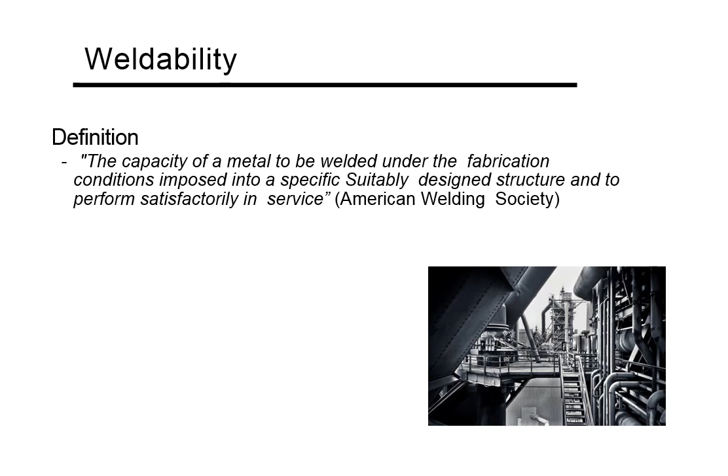When we're talking about welds, the two main mechanical properties are tensile strength and impact toughness. These are the two biggies, because you could have a material with great tensile strength that shatters like glass, or something with really good impact toughness that's really gummy and has no tensile strength - it just stretches and stretches and stretches.

So it's kind of finding that sweet spot for ferrous materials, particularly steels. You want the ability to absorb some energy, and you want the tensile strength that fits the design criteria. So these are the two ones we're looking at.

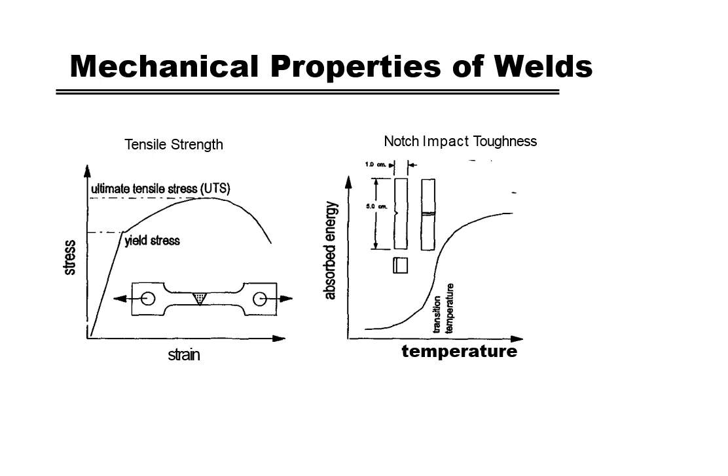Generally everybody's looking at this - all this stuff was started way before any of us were alive. And they realized tensile strength and impact toughness were the two big criteria for welds and materials made out of steels and irons and just ferrous materials in general.

Carbon equivalent. This is something that's going to come into play in regards to both preheat and post-weld heat treat. We keep talking about chemistry, and this is how we figure out our carbon equivalent. This little equation would be... loss of words there for a second.

Steels with a carbon equivalent below about 0.45 are readily weldable with appropriate procedures. So if you've got a material, and you crunch your numbers and look at your chemistry, and it comes out below 0.45, you're probably not going to have problems with it.

Carbon equivalent greater than 0.45 indicates a need for caution. Remember I said talking about caution, this should throw up a caution flag - well, this is it. If anything is above 0.45, that's when you need to start having preheat and whatnot.

Worked for a company years ago, and we'd always get a call from them. It was always a situation where they wanted the welding engineer to come bail them out. They'd made a weld on one of the components that had been in the field. Then they're like - and we'd ask, well what's the material? And they'd tell us, and we'd be like, okay, where's your weld procedure? How much preheat did you use? Well, we'd look at the material, me and this other engineer, and the carbon equivalent would be way higher than 0.45. They had just welded this stuff cold, and it would end up with a crack in it or something. So a lot of times you need to look at this kind of stuff.

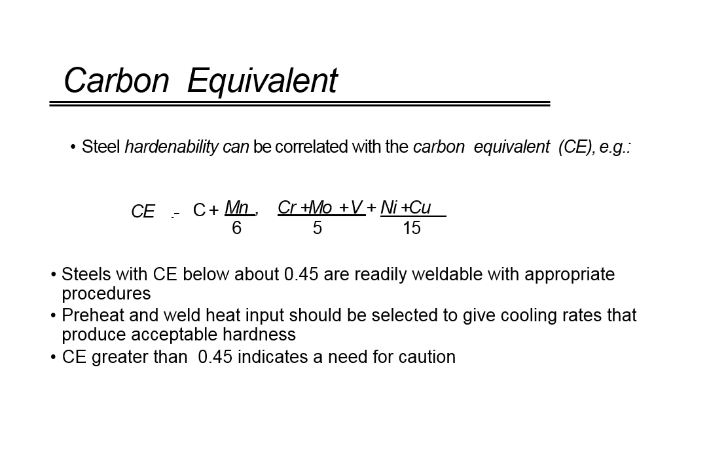This whole presentation I've been preaching chemistry, haven't I? Talking thickness and chemistry in regards to preheat, weldability, and post-weld heat treat. Those are the biggies, so something to think about. Hardness testing and tensile strength.

In carbon steels, there's a direct relationship between hardness and tensile strength. The harder the steel is, the higher the tensile strength. On the x-axis we've got tensile strength, and on the y-axis we've got hardness, Brinell. As you can see, as the hardness increases, the tensile strength increases. So generally, if you've got a soft, mushy carbon steel, the tensile strength isn't going to be very high. On the flip side, if you've got something that's really hard, odds are it's got a very high tensile strength. Something to keep in mind while dealing with ferrous metals, specifically steels.

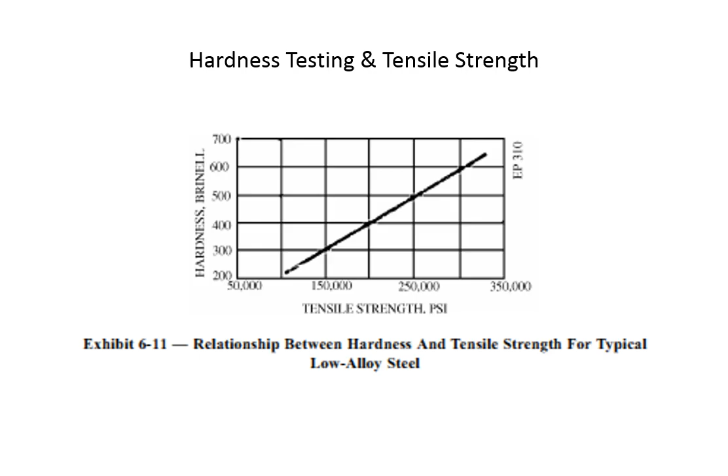The factors affecting weldability are the steel composition and processing. What's in that material? You've got iron, you've got some carbon, and then what else have we thrown in there? And in addition to that, how has it been processed? Did we quench it, temper it, do some kind of heat treating to get it to the material strengths or the particular variables we're looking for?

We want to look at the weld metal and the HAZ properties. When we weld this material, what happens? How's the weld metal going to come out? And then what happens to the heat affected zone on the base material? What happens in there?

Choice of welding variables can affect the weldability of steels. What's the weld process? Are we looking at travel speeds? What kind of fluxes are we using? There's a bunch of different ways that an organization can get themselves in trouble in regards to welding steels.

And pre and post weld processing affect it. Does this stuff need preheat? Does it need post weld heat treat? What do the codes say? What does the organization or the outfit that made the material, the manufacturer of that specific steel, what do they say to do with this stuff? How do they say to pre and post weld process the material?

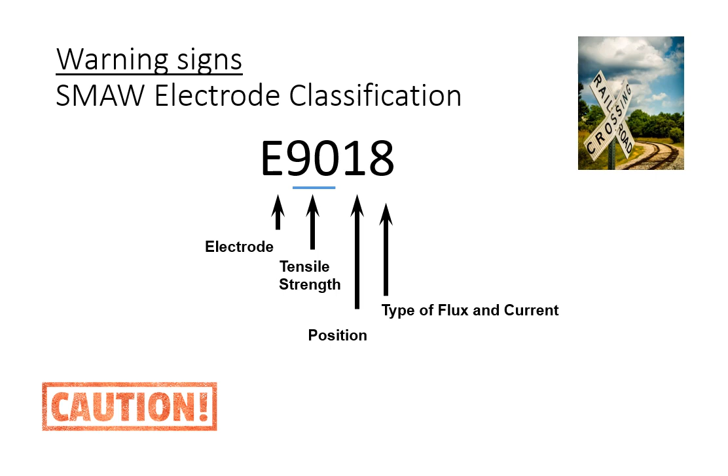Because a lot of guys just don't understand. They've welded with 70-18, and then you throw them some 90-18, and they're like, oh, all right, we don't really need preheat or post-weld heat treat or whatever. There's a lot of different ways things can go wrong, and they have gone wrong. So just something to keep in mind.

One place where you're going to run into this is the weldability of steels in AWS D1.1. AWS D1.1 breaks their steels - and I'm just talking about the pre-qualified materials - they've got everything broken out into 4 groups. Group 1 is the material that's pretty readily weldable, and you really are going to have to work to mess it up.

And I'm not saying it can't be messed up, but it's generally a pretty forgiving group of materials. That's why if you read through their expectations for pre-qualified materials for group 1, it's a group of materials that you can weld with cellulose materials like a 6010 or whatever. Over here I've got 3 columns: the groups, then materials, a material I pulled off their list, and the third column, outlined, the E70XXX, that's a filler material. So you can see we can use anything there. We don't have to use low hydrogen. We can weld it with that stuff and it's not an issue. So we could pick E7010 and weld with it, and there's no problems.

Well, as we go down to group 2, let's say we go with an ASTM A516, and I forget the grade that I had on that one. On there they've given us 3 options. You can go with a 7015, 16, or 18. 70-18 is what I'm most familiar with. I think I've dealt with some 16 at one point, but E70-18, that's pretty much the garden variety, off the shelf. Everybody makes it. It's a pretty good welding rod for welding with low carbon, structural grade steels. So you can weld with that stuff and not get into too much trouble. But there might be a situation with the thicker materials - you're going to need a little higher preheat, and you're probably going to need some post-weld heat treat. It's telling you, in that group too, if you read through AWS D1.1, it's a little more testy. Those materials take a little bit more care. But for the most part, if you act like a professional in the welding industry and follow the rules, you're probably not going to get in too much trouble with those materials.

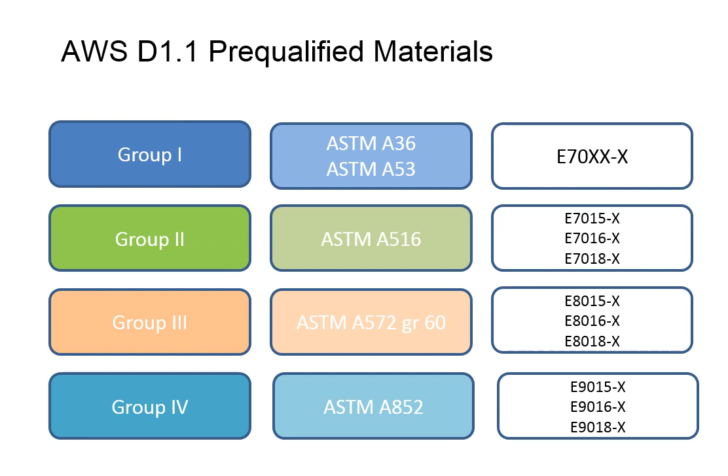Okay, now we're going to switch over to ASME P numbers. I did another presentation where I got off in the weeds and just talked about ASME P numbers. The assignments have been based on comparable base metal characteristics such as composition, weldability, brazability, and mechanical properties. So the American Society of Mechanical Engineers years ago got together and put together base materials into groups, and they called them P numbers. It's based on how well does this weld, what's the composition, is it pretty close to this stuff, mechanical properties, all of that. So that's what they put into it.

So my mind thinks in P numbers when I'm talking about metals. I've been at this going on 30 years. So if somebody's talking to me about a metal, I got to look it up and think of it as a P number. It's going to weld like an austenitic stainless steel, or it's going to weld like a carbon steel. So we're going to do a little bit of a deep dive into ASME P numbers and how they react, and just some general post weld and preheat numbers.

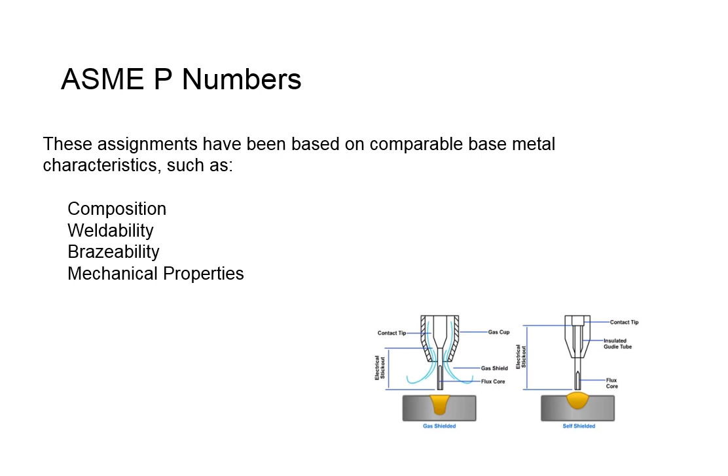Go from there. Okay, so ASME P numbers. Here's a list of some of them. I'm going to cover some of these on a couple of slides, but you can take a look-see here at ASME, the American Society of Mechanical Engineers, has grouped these together. Group 1 is carbon steels.

P number 2 is not used, but I asked the guy that was on ASME Section 9, why is there no 2? He said 2 is wrought iron. This is just trivia. Like the stuff the Eiffel Tower in Paris is made out of is wrought iron. Back in the day, I guess they used to make pressure vessels out of it back in the 30s and 40s. Kind of interesting. Useless trivia for you.

So then by the time we get to 3, 4, 5, 5A, 5C, you see we're throwing some chromium in there. That's generally for, you'll see this a lot in power plants, steam piping and whatnot. So that stuff's a little more difficult to weld as you start adding things like chromium and molybdenum in there.

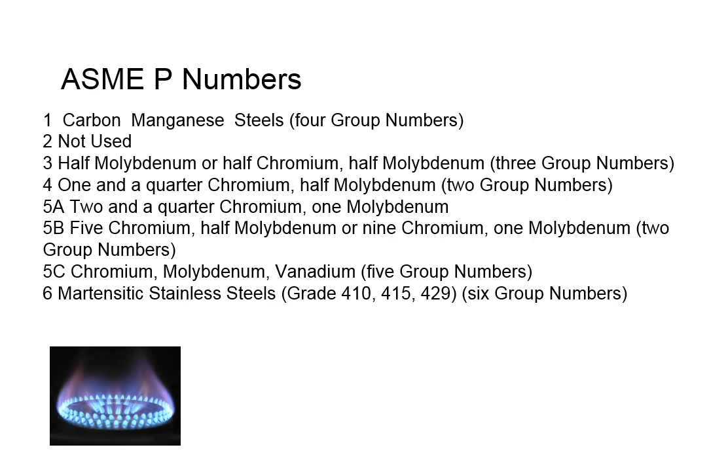Then we got ASME P number 6, martensitic stainless steels. Those things I think can be a little onerous to weld because it's a martensitic material. Anytime you see the word martensitic in a description of anything, I see the word martensitic and I'm like, whoa, time out. I got to go read and see exactly what this stuff is. So if you see a 90 KSI in carbon steels or an 80 KSI and you see the word martensitic, those to me are warning flags. It's like, okay, I'm going to have to go read. Maybe there's nothing, but I'll spend a half hour seeing what I'm welding before I charge on to anything with the word martensitic in it.

Here we've got ferritic stainless steels, austenitic stainless steels. Group P10H, I've dealt with duplex stainless steels. Generally there you're trying not to put too much heat into the material because that'll just mess it up. So you want to keep your heat inputs on that material generally pretty low. Any weld procedure you qualify with that, you got to keep your interpass temperatures low. Used to work at an outfit where we did a weld procedure on like 12-inch thick duplex stainless steel, and we couldn't get the interpass temperature above a couple hundred degrees, so it would take us days to do the weld coupon. I'm not kidding. It was a thick material, and the welders would just sit in there until it cooled down again. All right, run another pass.

The other one we want to look at here is 15E, which is 9 chromium, 1 molybdenum. These are getting to be more popular in steam power plants, and these are really creep-resistant materials. Creep strength enhanced ferritics, I think is what they are, CSEFs. But these things are pretty onerous. You got to have the preheat right. You got to have the post-weld heat treat right. There's an intermediate post-weld heat treat that you've got to have in there and done correctly.

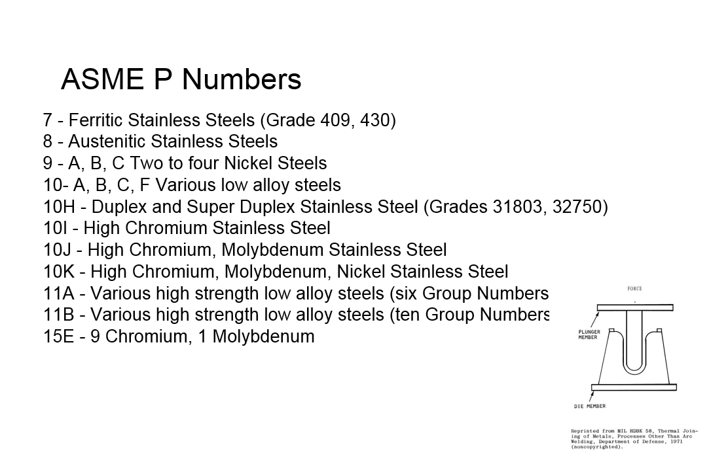If you see anything that's like 9 chromium, 1 molybdenum, that's a big warning flag. You're on thin ice there. You need to do some reading if you ever have to qualify a weld procedure with that type of material, because you're definitely swimming in the deep end of the pool, and not only are there sharks, but there's piranhas in that pool with you. So you got to know what you're doing if you're going to weld the 15Es. Not a very forgiving group of materials, but something to keep in mind.

So because you've got ASME boiler and pressure vessel code section 1, you've got B31.1, B31.3, a whole bunch of different welding codes. I'm just going to take one of them, ASME section 1. For the most part they all address the material more or less the same. You just need to be careful and read whatever specific code you're working on, and don't go off a different code.

So preheating, from PW 38.1. The need for and the temperature of preheat are dependent upon a number of factors such as chemical analysis, degree of restraint of the parts being joined, elevated temperature mechanical properties, and material thicknesses. So here you're looking at chemical analysis - what's in that steel, how big is the restraint, how hot is this thing going to be when it's up and running, and the material thickness, which makes a big difference.

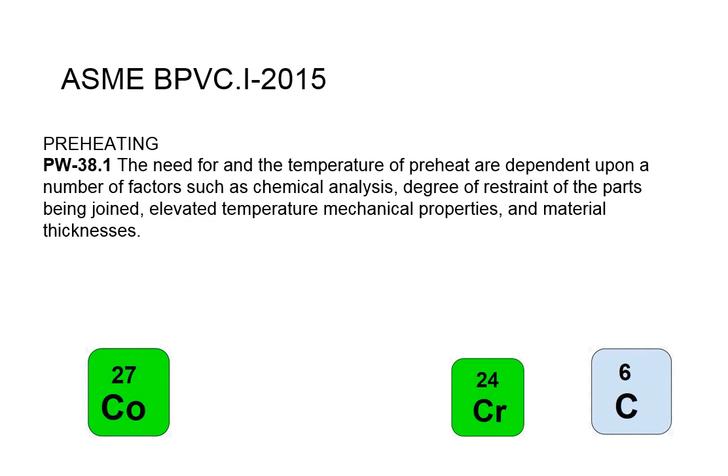I'm going to slam through some minimum temperatures for preheating. These are all from ASME boiler and pressure vessel code section 1. So P number 1, which is similar to the group 1 and group 2 materials mechanically in the AWS D1.1. This is the low one. The first thing they're throwing out there is the carbon content. If it's in excess of 0.3 and the thickness of the joint is in excess of an inch, you got to take it up to 175 degrees F before you start welding on it. But if it's less than an inch and it doesn't have a very high carbon content, you go to 50 degrees - it's pretty forgiving material.

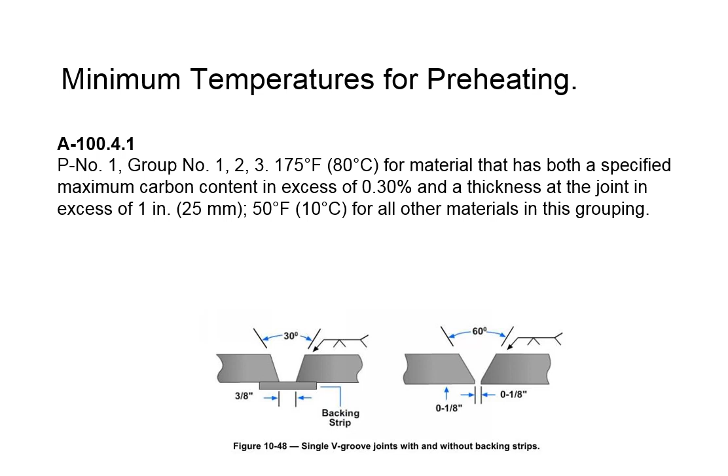So this is, once again, if your carbon content gets up there in excess of 0.3 and you've got a really thick material, 2-3 inches, you got to heat it up to 175 degrees before you strike an arc on it. So P3 is a little more onerous than a P1 material.

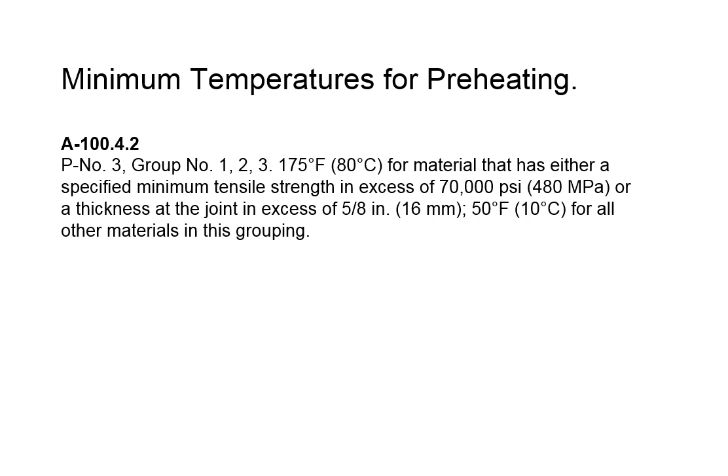So here, you go to 175 for a material that has either a specified minimum thickness or tensile strength of 70,000 PSI, or a thickness in excess of 5/8 of an inch. For all other materials, you can go to 50 degrees. So if it's in excess of 70,000 PSI, you got to go to 175, or if the thickness of the material is 5/8 of an inch or greater, you go to 175. For everything else, you just go to 50. So you can see as we're going through this, we're getting a little more difficult to deal with.

P4 materials, you've got 250 degrees for anything that's in excess of tensile strength of 60,000, or the thickness of the joint is in excess of half an inch. So you can see as we're ratcheting it up here, P3, P4, those materials all need a preheat. Group 6 or P6, that needs 400 degrees F before you even start. So that's telling you that this stuff is pretty tricky to deal with.

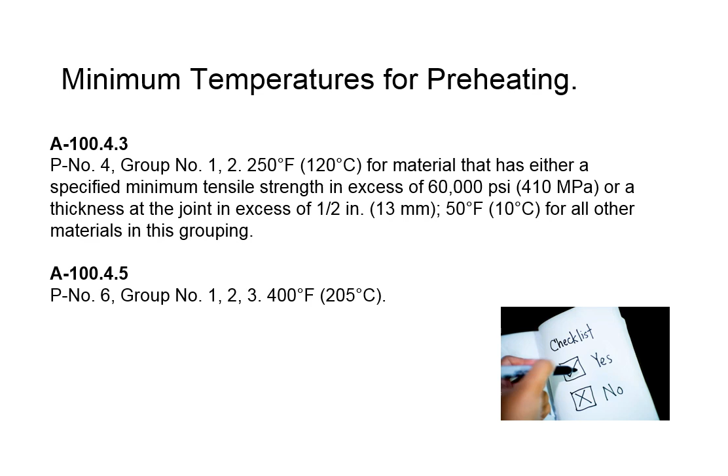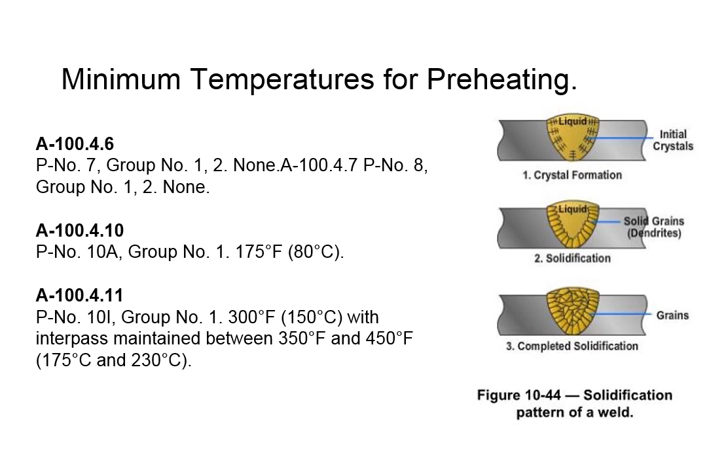But they line it out for you for the most part, and with a little bit of research and putting together your documentation, you can get most of the stuff welded pretty readily. But once again, it gets back to weldability. Stuff that needs a 300 degree F preheat and an interpass temperature of 350 to 450 is probably a little more onerous than just welding some carbon steel - weld it and you're done with it. So here's a couple that I've dealt with in the past that were pretty difficult.

The first one is like the group 5A, 5B. These things are kind of difficult to deal with. Not difficult, but you're preheating it to 400 degrees. So if you've ever welded or had to preheat something, preheating something to 100 degrees takes a lot of thermal energy to get it there. To get something to 400 degrees, especially if it's a thick material, you're talking a lot of heat and a lot of fire. So it's just something to think about.

And they also throw in there, in the 5A and 5B, you need to look at the materials and what's the chromium content. So there's some things you really need to look at.

So for P15E, I worked for a company that used to do some P15E material. This is 400 degrees F before, and a tensile strength in excess of 60,000 - most of that stuff does. And then you have to look at the chromium content - if it's above 6, and a thickness of the joint in excess of half an inch. So you're either going to 400, and if you aren't going to 400, you're going to 300. So this stuff is very particular, and you can have all kinds of cracking related issues if you don't follow the recommendations on how to weld this stuff to the letter of the law and follow all the rules and really take care of this stuff.

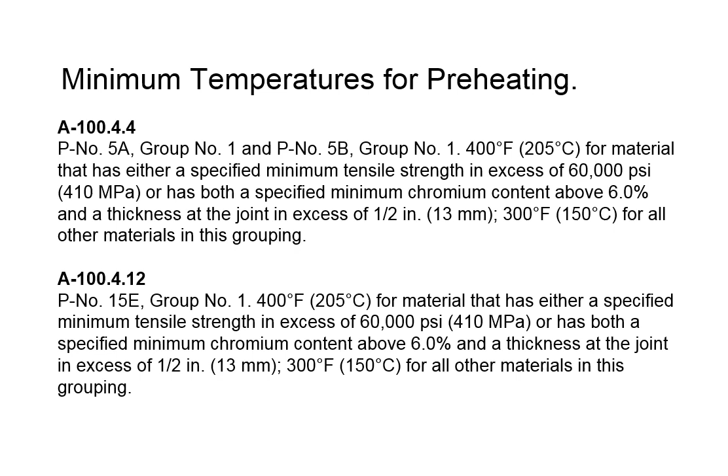So if you're looking at post-weld heat treatment, if you look in ASME B31.1, B31.3, or ASME Section 1, there are pages upon pages of post-weld heat treatment for the different P numbers. It gives you a general outline of what needs to be done, and then there's about three-quarters of a page of exceptions or little caveats that you need to look at for thicknesses and whatever.

So with that being said, here is my version of post-weld heat treatment for ferrous materials, carbon steels, and whatnot. These are the 3 biggies. Steel composition and processing - what is the chemistry? You got to look at the chemistry of what's being post-weld heat treated and how it was processed - quenched and tempered or something. Are you going to mess it up if you post-weld heat treat it? Or if you post-weld heat treat it too long, are you going to turn it into absolute mush? You're going to take a material that was supposed to have a certain hardness and cook that hardness out of it, basically anneal it.

You got to look at the weld metal and the HAZ properties you're looking for - these need to be taken into account when you're looking at post-weld heat treatment. And the thickness of the material also comes into play, because if you put something in the oven that's 10 inches thick and you just cook the outside, you post-weld heat treat the outside and don't get the inside, well then you kind of defeated the purpose, right? So these are the things - to me I'm trying to boil down pages upon pages of post-weld heat treatment into 3 lines: steel composition and the processes done to get it to those mechanical and physical properties you're looking for, the weld metal and HAZ properties, and the thickness of the material.

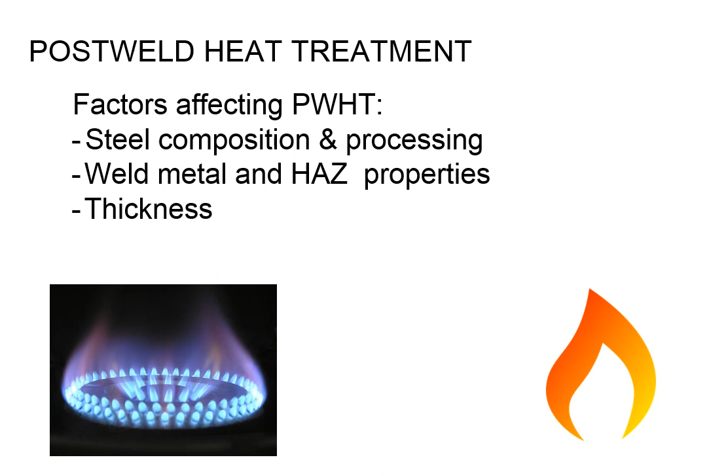Steel composition and processing. Weldable structural steels for use at ambient or moderately elevated temperatures fall into 4 categories - key word here, structural steels. Carbon and carbon manganese steels, high strength low alloy steels, normalized and tempered high tensile steels, and quenched and tempered high tensile steels. Each one of these categories has its own nuances involved in being able to weld it and have a weld come out that meets the criteria for the weld joint and matches the base material, the tensiles and the hardnesses, and make sure you don't have a messed up heat affected zone. So yeah, these are pretty much the 4 categories, and each one is a different animal. I'm not going to go into each one in detail, but we're kind of covering some of them.

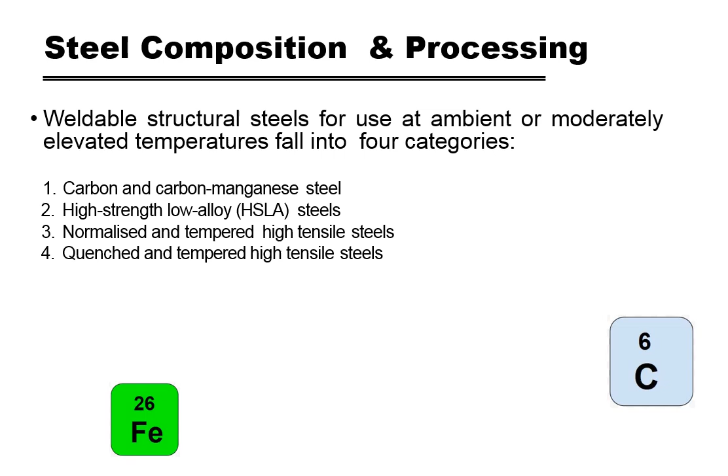Main alloying additions in steel. So steel is iron, and you throw in some carbon.

Carbon is a potent solid solution strengthening element in iron. It's the biggie. Carbon increases tensile strength but reduces ductility. So you make a really sharp sword that's got a really high tensile strength, but you're going to be able to shatter it too, to some degree.

High carbon content promotes formation of hard, brittle microstructures on cooling from above the phase transformation temperature. This gets back to Metallurgy 101, when steel goes through an allotropic phase transformation, from body-centered cubic to face-centered cubic, back to body-centered cubic, and then into a liquid, and then cooling it all down really fast, you end up with martensite, which is body-centered tetragonal.

But anyway, the more carbon you put in there, and then you heat the material up above the phase transformation temperature and cool it really quickly, all that carbon that was dissolved in solution doesn't have anywhere to go.

So that's why we throw in manganese sometimes, to increase strength without reducing ductility. It improves notch toughness and reduces hot cracking. A lot of times you'll throw manganese in a steel to increase the strength, but you're not losing the ductility. So it's not a really hard, high tensile strength piece of glass, so to say. The manganese helps keep the ductility in a range that's something you can work with. It makes it a useful tool.

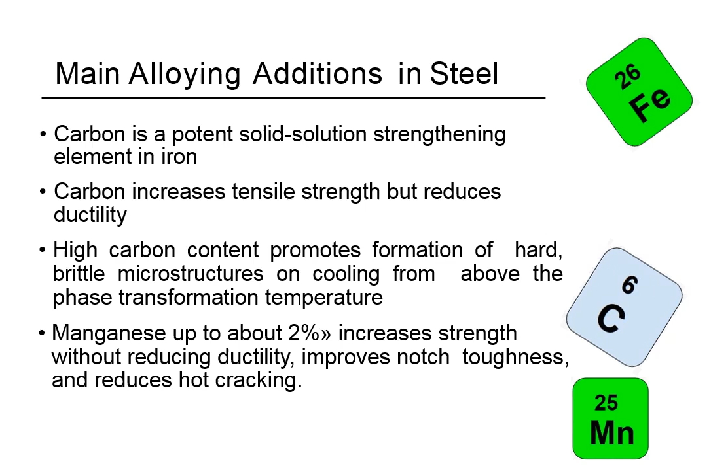So along with the things that we want in steels, like carbon and manganese, there's also a lot of impurities that get left in there. If you look back on how they made steels in the 1800s, there were a lot of impurities before they figured out how to clean the material up.

Sulfur, phosphorus, oxygen, and nitrogen are the biggies. Phosphorus decreases toughness. Phosphorus and sulfur form low melting compounds that promote weld and HAZ solidification cracking. Oxygen and nitrogen form dispersions of oxides and nitrides that strengthen the metal and reduce its ductility.

So these are all things that when they're making steels, you don't want a lot of sulfur, phosphorus, oxygen, or nitrogen in your weld pool or in your weld metal in general.

And I've read some things where they think part of the reason the Titanic might have sunk is they had really dirty steel. Some of the rivets might have been made out of really low grade steel, and they needed so much steel to make that ship that they could have been getting a lot of material that was substandard. But I don't know if that's here nor there, but it's something to think about.

So these are things you do not want in your steel. Generally most specifications have a limit on how much sulfur and phosphorus you can have in your material. So something to keep in mind as you're looking at welding certain materials, realizing these are the bad actors in there and they can mess things up.

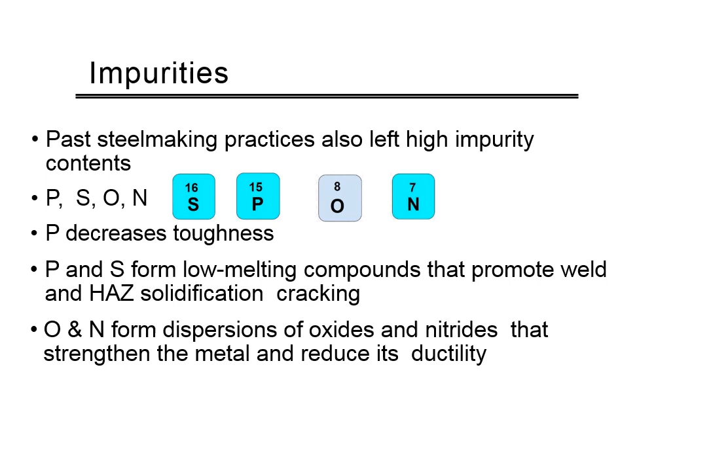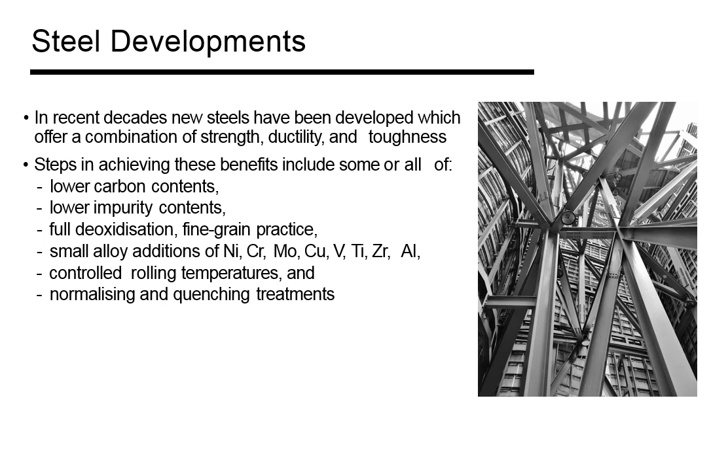But some of these materials are readily and easily weldable, and some are a little more difficult. You might have to do your research and really develop a weld procedure that fits that material.

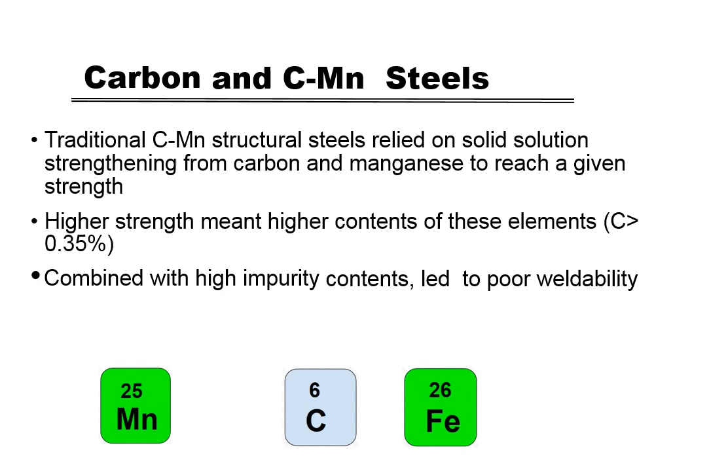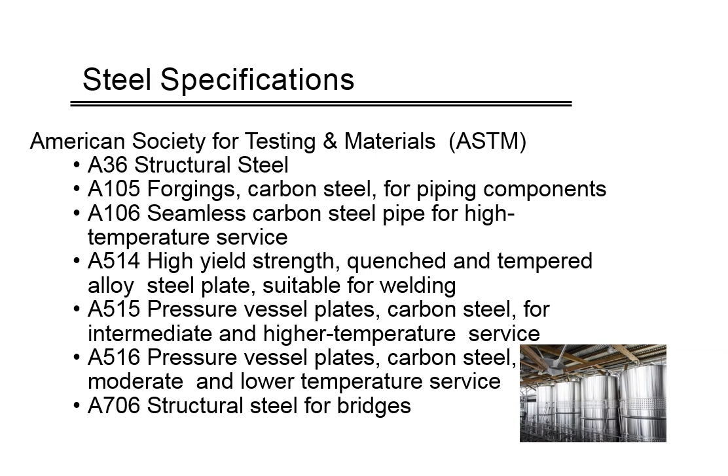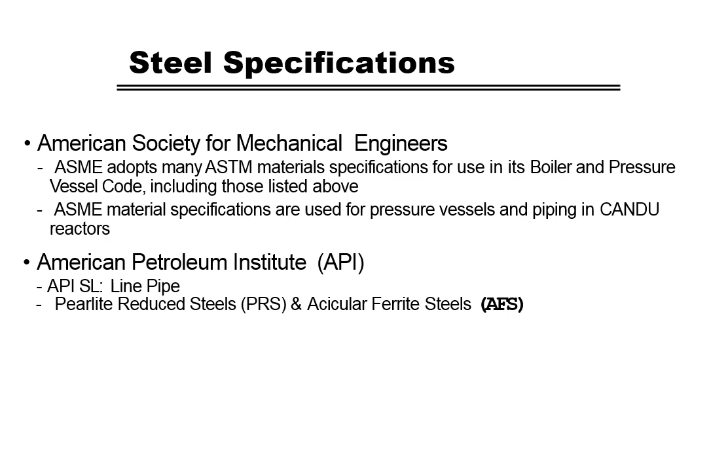So these are some steels you might want to look at some point if you're building something and you need pipe. High strength, low alloy steels.

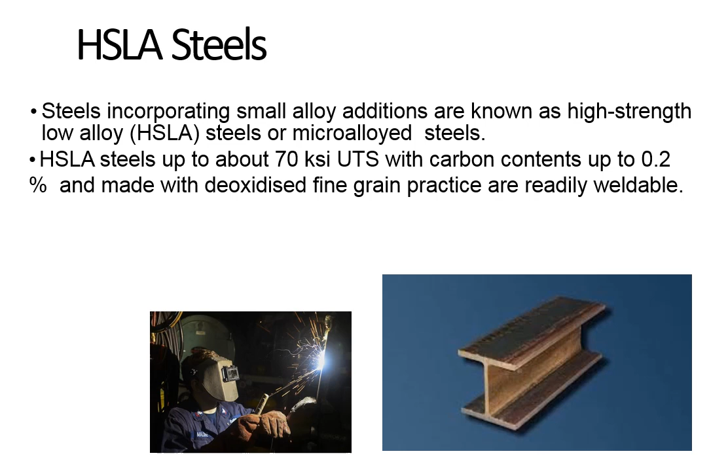Steels incorporating small alloy additions are known as high strength, low alloy steels, or microalloyed steels. High strength, low alloy steels up to about 70 KSI ultimate tensile strength, with carbon content up to 0.2%, and made with deoxidized fine-grained practice, are readily weldable. So there's a whole list of high-strength, low-alloy steels that are readily weldable. Just need to follow the directions and make sure your workforce is on board with what you're doing, and generally it shouldn't be too much of a problem to weld this stuff.

Quench and temper steels. Steels that rely on quench and temper heat treatment to obtain a very high strength are more susceptible to welding problems and require specific metallurgical expertise. For example, ASTM A514. I looked up some manufacturers' data sheets on welding ASTM A514.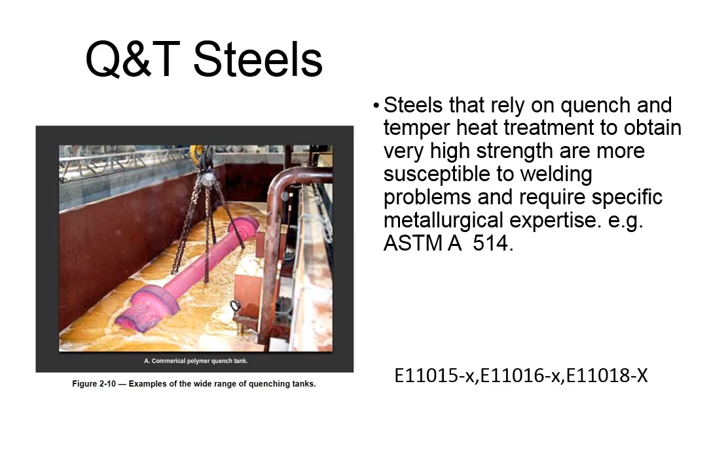So it just means it's weldable, but you just got to be careful and follow the rules. It's not something to dabble in lightly, but it can be done. Do some research, dig through the American Welding Society welding handbooks, and do a Google search on welding this stuff, and you can put together a pretty solid welding procedure in no time. But just realize you're playing with fire here. You're dealing with a material that you should handle with some care and some level of expertise.

Properties of the HAZ. The response of the parent metal and reheated weld metal in multi-pass welds to the weld thermal cycle determines the properties of the weld heat affected zone. The main factors are steel composition and processing, peak temperatures, and cooling rates. The yield and ultimate strength of the HAZ are usually higher than the parent metal, so the main properties of interest are hardness and toughness.

So this is just telling us that you got to watch that, because with a weld there's a thermal cycle, right? You're heating the material up, you're cooling it down. Let's say your guys go away for lunch, it cools all the way back down to room temperature. You preheat it, and then you weld like hell for a while, a few hours, and you heat that piece of metal up, and it cools down, and it heats up. There's a lot of stresses that are introduced into that piece of material.

So that's why we worry, and it's not just the weld we're worrying about, we're worrying about the heat affected zone. How wide's that heat affected zone? Are we watching our heat input into that material? What do we got really going on there? So, we're talking about the yield and ultimate tensile strength usually going to be higher than the parent material in this.

So we really need to watch out and make sure we don't have a heat affected zone that's going to be harder, softer, or outside the boundaries of what our materials should look like. So we really need to keep an eye on the HAZ.

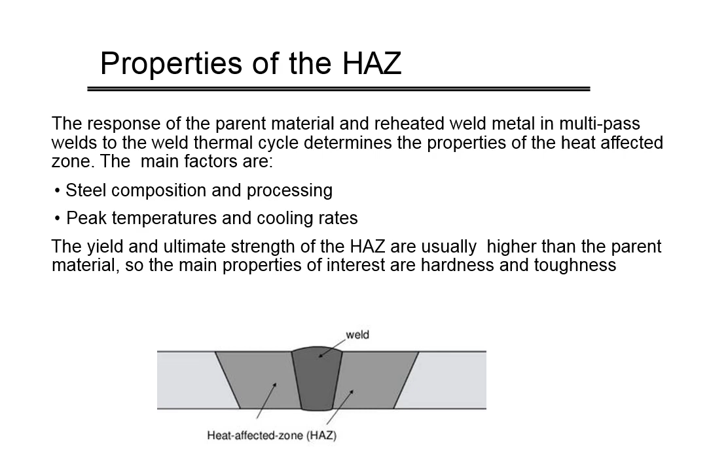HAZ hardness. Hardness is a measure of tensile strength and degree of embrittlement. In carbon manganese steels, HAZ hardness exceeding 350 HV, hardness vickers, is considered excessive. HAZ hardness is determined by alloy content and cooling rate in the transformation temperature range.

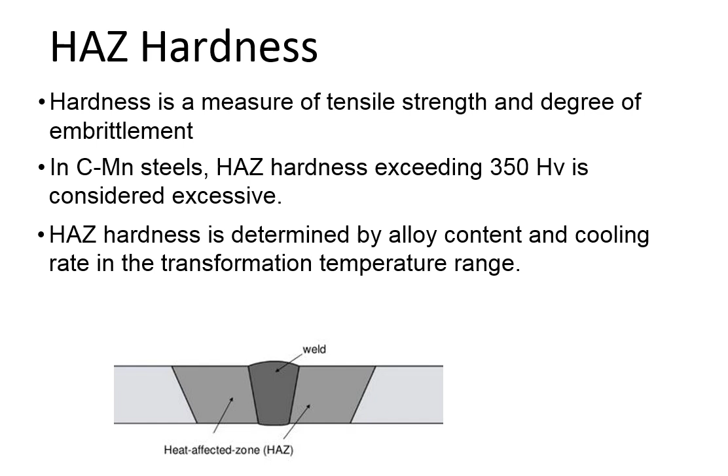Fracture toughness of the HAZ. Factors affecting toughness are the weld thermal cycle, grain coarsening temperature of the steel, transformation characteristics, and alloy or impurity content. Gets back to us talking about what's in there - phosphorus, sulfur, what kind of impurities are in there.

What was the thermal cycle of the welds? Has it been heated up, cooled down, let to sit, started up again, sat in the rain? What happened to this piece of material? And these all affect the fracture toughness of a material.

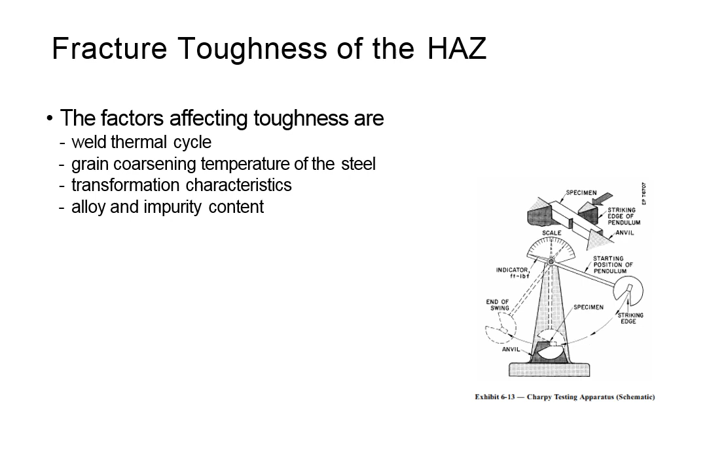If the fracture toughness of the parent steel is low, the toughness of the HAZ is usually low, and conversely, fine grain practice and microalloying benefit the HAZ as well as the original material.

Low heat input welding procedures give a finer HAZ grain structure and better toughness in low carbon equivalent steels. However, in steels with a high carbon equivalent content, HAZ hardness considerations set a minimum heat input. It is sometimes difficult to get adequate toughness in high carbon equivalent steels.

That last one is - we used to go round and round trying to qualify weld procedures for use in oil type situations. And they'd want a really high tensile strength and a really good toughness. It was really difficult sometimes to hit that sweet spot because you get too high of a tensile strength and your toughness is going to go to hell in a handbasket.

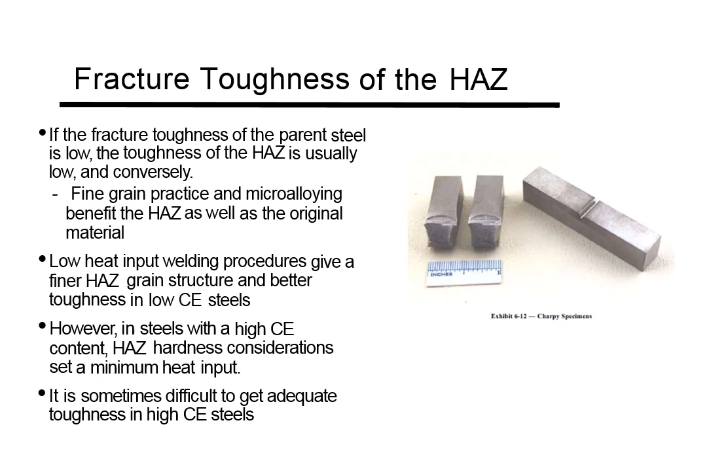So it's trying to hit that metallurgical sweet spot, and depending on what heat treatment you're doing and what filler materials you're using, it can be a real balancing act trying to get everything fine tuned. So something to think about when you're welding this, looking for fracture toughness and a high tensile strength.

Weld metal tensile strength. The factors that govern the tensile strength of the weld metal are the carbon content. Carbon and manganese increase strength - I don't know how many times I've said that or will say that in this presentation. Ferrite grain size: tensile strength increases as the ferrite grain size is reduced.

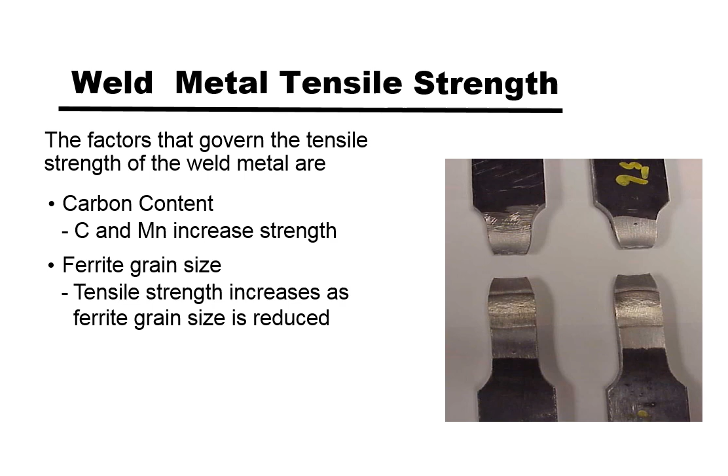Summary of the weldability of steels. Kind of trying to wrap this up before it turns into a 6-hour Gary Pace rant on how the universe functions. But anyways, the ideas that I've gleaned from others on the factors affecting weldability are steel composition and processing - what's in that steel and how was it processed? Quench and tempered or something, whatever, annealed, who knows?

What HAZ, weld metal, and properties are we looking for? Welding variables - travel speed, heat input, all these kinds of things play a huge role in the weldability of steels.

And then what do we need to do to the material before and after we're done welding it? Do we need to preheat it, post-weld heat treat it? Thickness is another one that really comes into play in my mind. If we're welding 6-inch thick pieces of material, that's a hell of a lot different than welding 1/2-inch thick material. So that's another one that comes into play.

And then welding processes - what welding process are we going to use? There's a number of these, but basically that's what we covered. I also touched base a little bit on how ASTM, AWS, and the American Society of Mechanical Engineers view weldability of steels and kind of break it out.